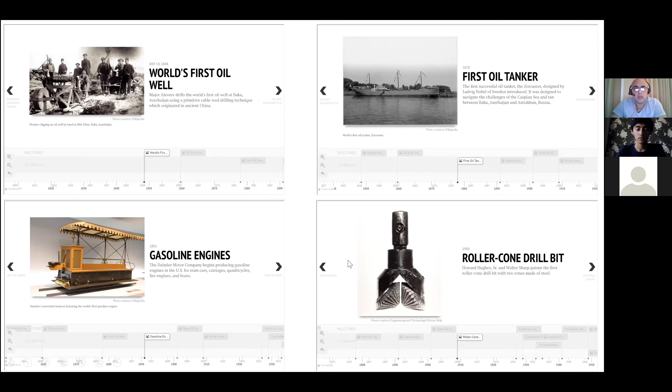Moving one by one: electrical logging. Nowadays it's also very typical, a simple thing, but it was introduced back in 1927.

Then we also got controlled directional drilling, because you always start with something simple - even just a vertical well is not an easy thing because of many risks. But Eastman, back in 1929, started doing directional drilling which he could control. I don't know to which degree, but there were successes.

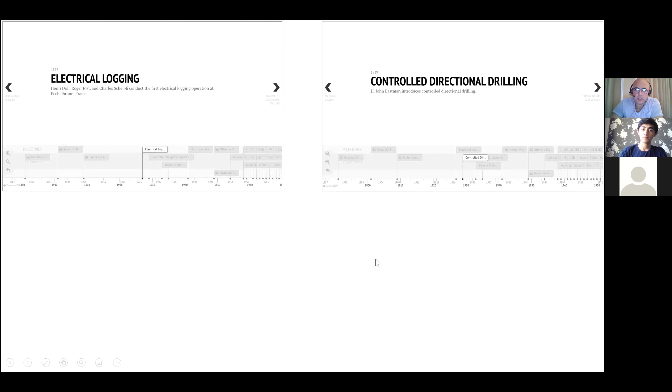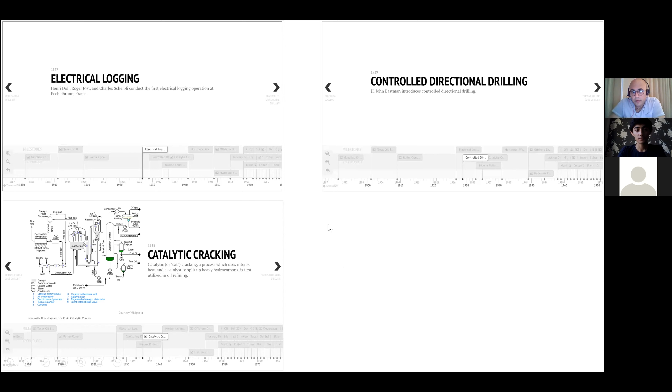Catalytic cracking - one of the important things in terms of refineries. This is the process of separation using intense heat and catalysis, splitting the heavy hydrocarbons. That was a big step forward for the industry overall, corresponding to the year 1935.

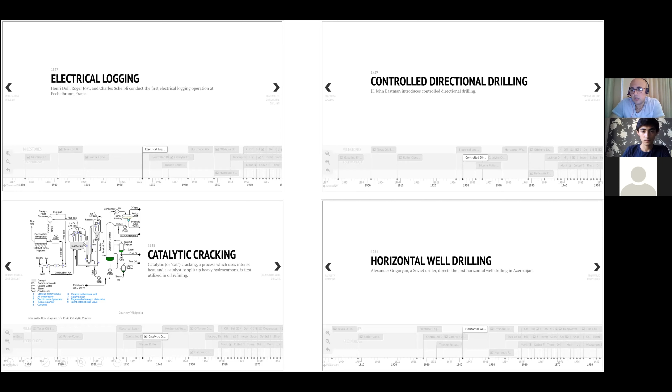Then horizontal well drilling - this is related to onshore horizontal drilling, and it also happened in Soviet Azerbaijan back at that time. Another quite remarkable thing for our country.

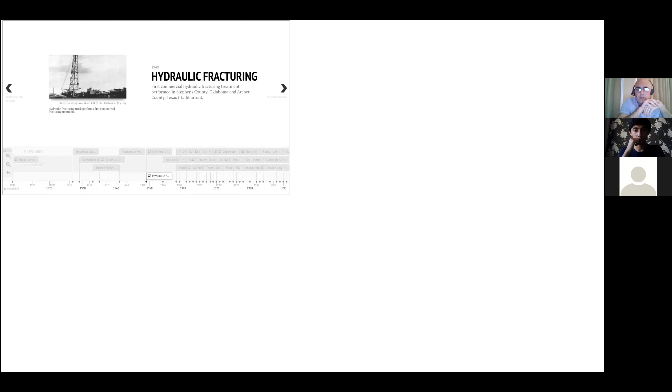Hydraulic fracturing - possibly all petroleum engineers nowadays have heard about it, especially during the events of 2014-15 with US shales, frack and pack, which dropped oil prices a lot, and the industry got mad while some companies got rich. But it first happened back in 1949 in Stephens County, Oklahoma, US, and a small county in Texas. Halliburton was the first to successfully do that. Back at that time, how you frack the well and why you even want to fracture your reservoir layers were not obvious to people. Imagine how much time, effort, and passion was spent on that. All of these events were remarkable in history.

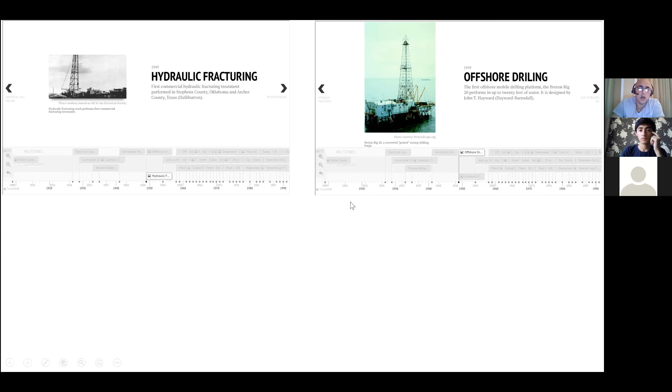Offshore drilling, back to '49 - SPE International basically claims the first happened in '49, the Breton rig. After that, many fields started being put into production, and nowadays we have so many offshore hydrocarbon fields under development.

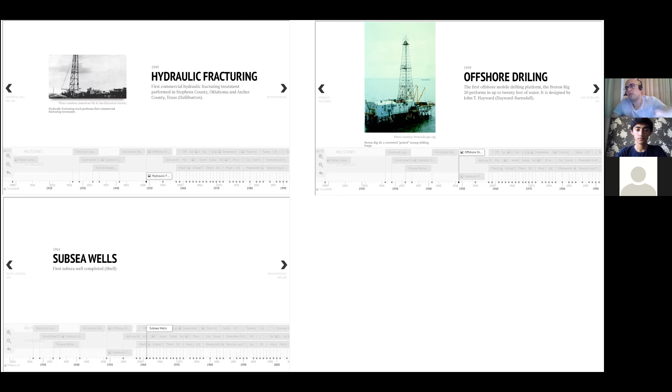Subsea wells, the year '61, first done by Shell company, another oil giant working on the petroleum industry. If you haven't heard about subsea wells, it's an alternative technology with some advantages - you're basically placing a lot of equipment on the bottom of the sea, which has a lot of benefits for those who do it.

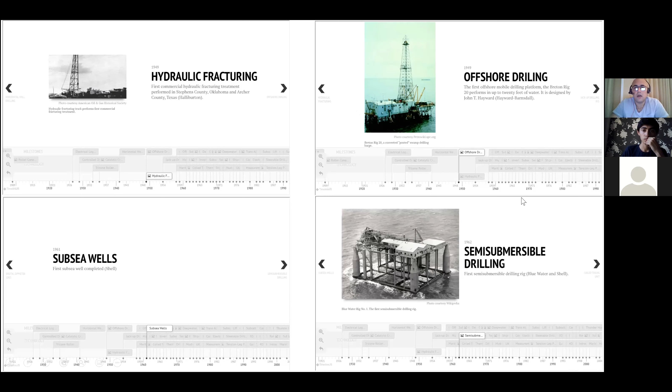So what do we do next - logging, but this part dates back to year '71. What was very important was the first logging system combining gamma ray, SP (spontaneous potential), induction spherical focused resistivity, sonic caliper - a set of several tools done for the first time, by the oil field service giant Schlumberger, back in '71, all in one.

There's a saying that diamonds are a girl's best friend, but not only - I'd say they're also friends of the drillers. They put diamonds into their drill bits, and that's where polycrystalline diamond compact drill bits came into place for the first time, corresponding to the year 1972.

We shortly call them PDC drill bits. As you know, since oil became crucial in the world of industries and people's lives, more demand, more population means the more oil or gas you want to find, new basically reservoir layers and rocks you are facing, and you need to invent new things. Drill bits in general are among the top things needed to succeed in that. You need to invent those, right?

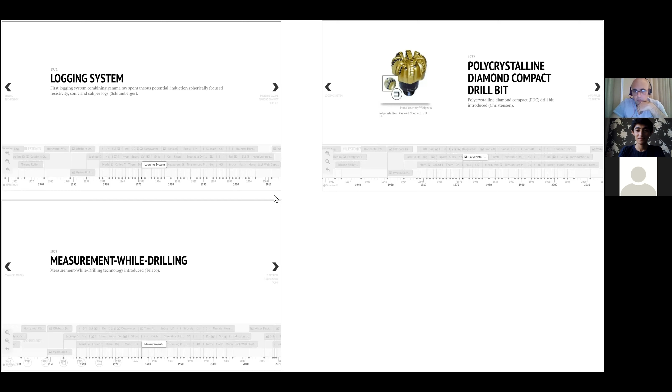Electrosubmersible pumps. Pumps are everywhere - it's not just about the oil industry, it's generally about all industries. We have pumps in the oil industry, and people have pumps in their yards to get water from wells drilled maybe 10, 20, 30 meters deep. They also put pumps over there, but to make it electrosubmersible means you're placing it into the well. That was quite a deal, especially imagine in a well which is usually kilometers deep. So we as an industry could do that back in 1980.

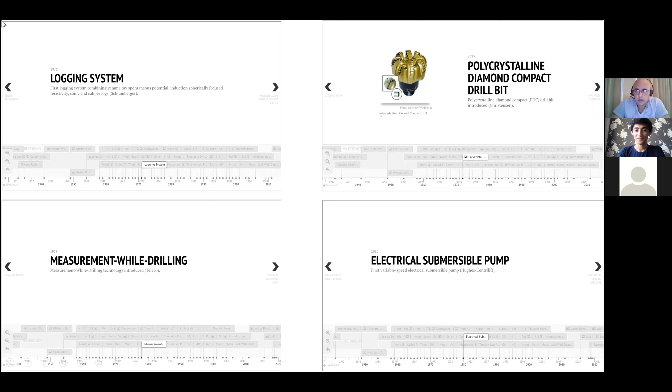3D seismic. Now we are moving to another topic. Probably some of you were asking why there's nothing on seismic or geology. So 2D seismic always existed, but 3D seismic is another story - you're basically doing it like grids, in comparison to 2D, and that was another step forward for better production optimization and field development. That has huge implications on sweet spot detection for future well targeting and understanding the reservoir's general behavior - where are the sands, where are the shales, where are the structures, and mostly where are the faults, if possible to see them.

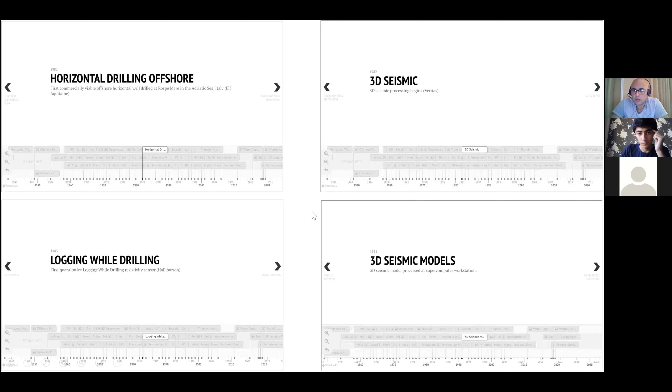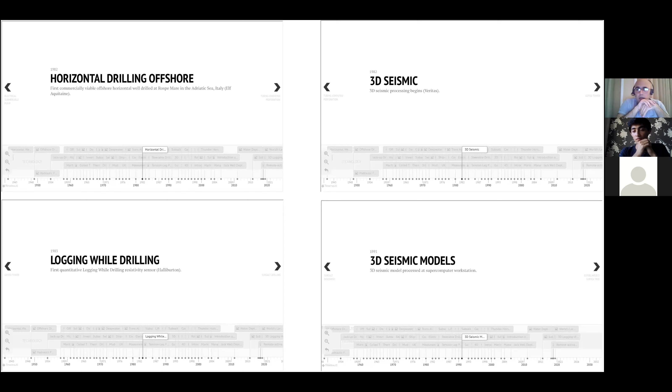3D seismic models go more into computational power. As noted, the year '82 brought us 3D seismic as data, and they were processing it, but they started to see that more and more models were needed, and more processing for seismic data, because seismic data is always huge in terms of memory. Look at the year 1991 - it's claimed that a 3D seismic model was processed at a supercomputer workstation. Back in '91, a supercomputer meant what a regular laptop is today - even as a child, that was such a toy thing to me. But they were building machines, rooms of computation as much and as good as they could, and it was quite expensive, and they were trying to do their seismic processing back at that time.

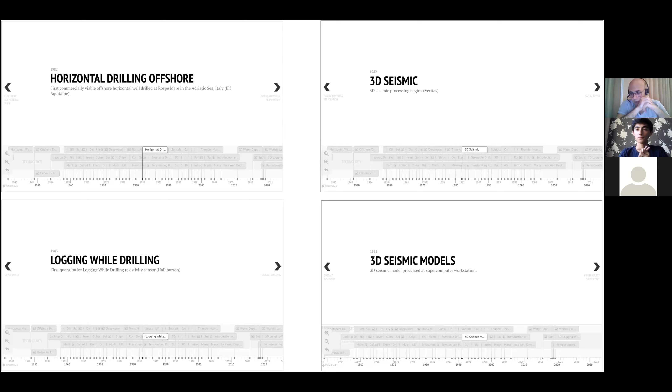Why was it possible? Because the oil and gas industry is rich - let's put it this way, they have resources, they have money, so they afforded it. For seismic monitoring, another step happened in '94, done by a company called CGG, quite a big one as well.

In terms of why we call it 4D, it's just time lapse. So you have 3D structures of your reservoir, but during the production, many things are changing. Amplitudes and responses, as most of what changes is a fluid distribution. So usually you have oil, gas, and water. They are changing. You do water injection, gas injections, and many stories around it. So you wanted to see dynamics. So 4D seismic back at that time was done first in '94 with CGG.

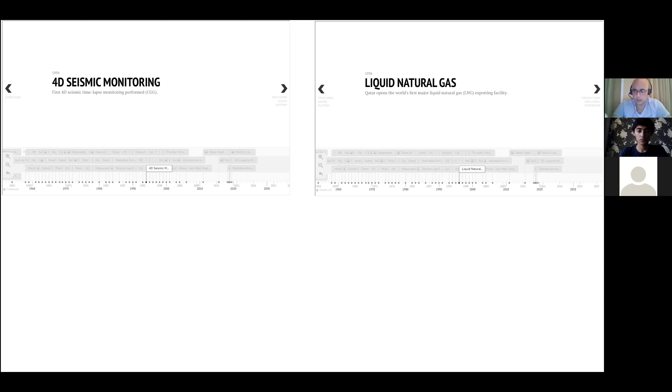Liquid natural gas. Imagine that such a simple thing like we see right now on a commercial, industrial, and wide scale was done first by Qatar, and Qatar opens the world's first major LNG exporting facility on a big industrial level back in '96. So why? The physics behind liquid natural gas might not be rocket science. Earlier than that date, the compression and storage stories for LNG were known, but I think that prior to that, probably there was no such a big need to do LNG.

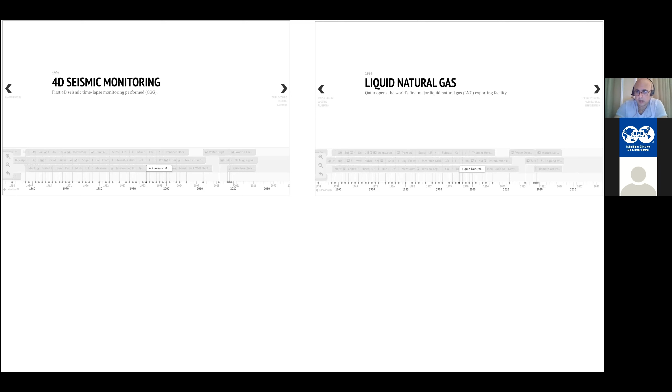Yeah, and as you know, also with the gas, it is the huge games of geopolitics. Oil prices are playing ups and downs every day and every minute, but gas trades are based on contracts. On local markets in the US, it's also playing around in each state how they sell to people and all of that. But between the countries, there are contracts, and also a lot of geopolitics happens. And LNG was done late, but it is considered a big step because LNG can also be transported easily.

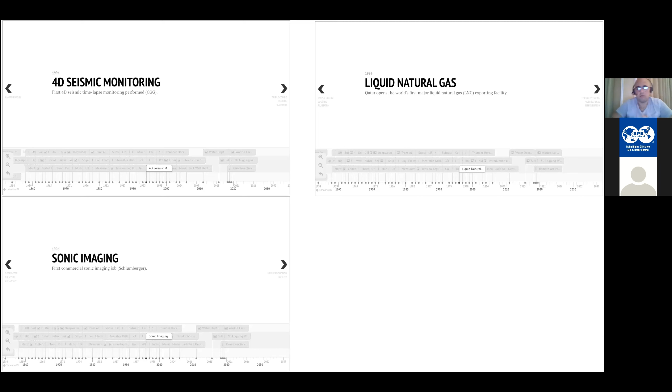Sonic imaging. For those who never heard of it, highly advised to go through that. Schlumberger did the first commercial sonic imaging job. It is quite expensive as far as I know, even till now. It was in '96, but not all companies can afford doing it, but it gives huge benefits.

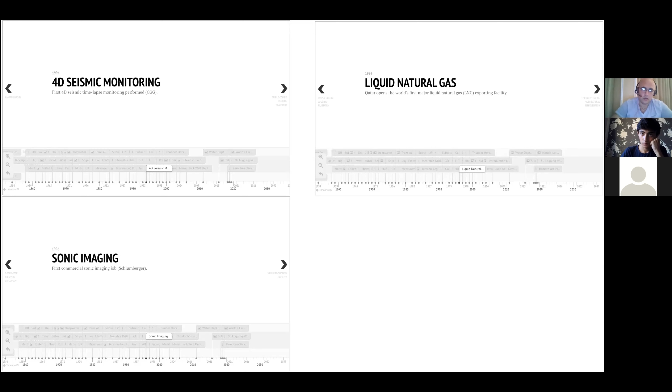So-called intelligent wells. What is intelligent about them? Basically, it is a well which can be monitored remotely. So you are sitting somewhere 100 meters or kilometers away, and you can do something to your well, such as closing the choke, closing the well, and all of that. And it happened in Norway first, in the Snorre field, Saga and PES.

'98 was the year. Extended reach well depth record, 10 kilometers, so quite a long extended reach. The well was drilled by BP, and it's not the deepest well. You can check for the deepest well ever drilled in general.

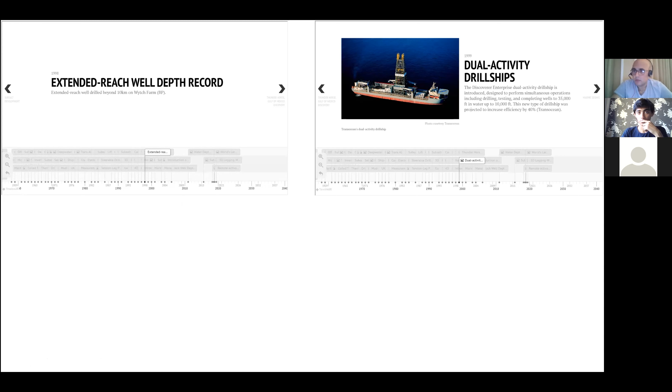So dual activity drill ships. Transocean was able to come up with an engineering solution: a drill ship where they can do a couple of things simultaneously. In this scenario, they were doing drilling, testing, and completion at the same time. And they have done it on 35,000 feet, and water depth was 10,000 feet. So not the best conditions, but they were able to do that.

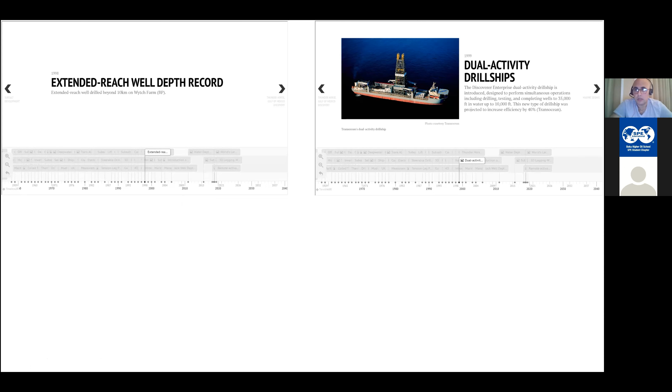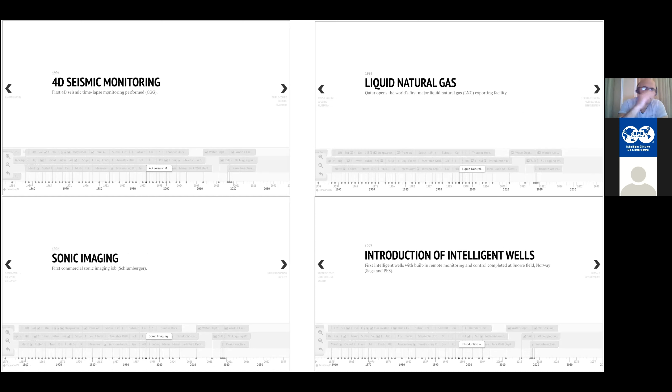And even beyond, now we call them smart wells. The industry in general is even trying to step towards solutions where they become autonomous, where human interaction is almost reduced. You do algorithms so that when something happens, the well reacts itself, without waiting for engineers to do something. So it's all going towards those autonomous stories. Though that part is mostly under development, part of current and future developments. But for now, intelligent wells with some remote monitoring, yes, they do exist.

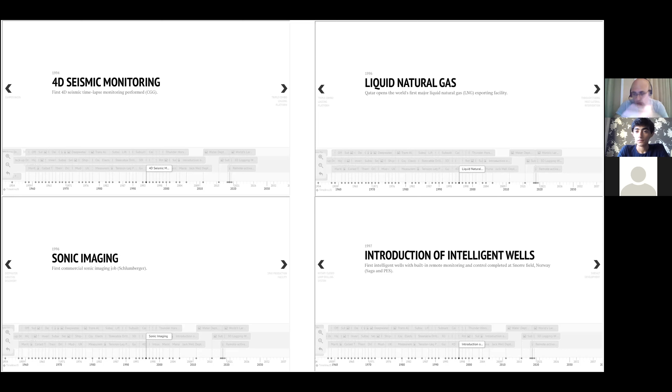Thank you. Sure, sure.

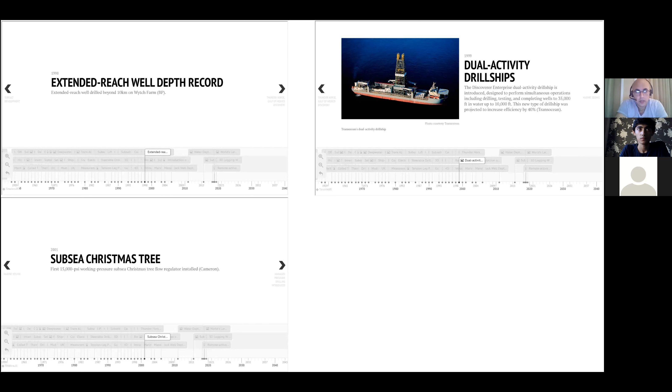So, subsea Christmas tree. I just mentioned the subsea before, and you all probably know what a Christmas tree is, that nice thing which saves lives, because of the safety, and allows us to produce and all of that. But on a subsea level, imagine it on the seafloor, handling 15,000 psi. It was first done back in 2001 by the company called Cameron. I guess it is Schlumberger's now.

Managed pressure drilling. Drillers never stop exploring, and they shouldn't stop, because there are more and more challenges. You need to invent, and to do safe drilling. You probably went through the concepts, especially PEs who already studied drilling engineering: the concepts of overpressure, losses, kicks, and blowouts, and all of those stories.

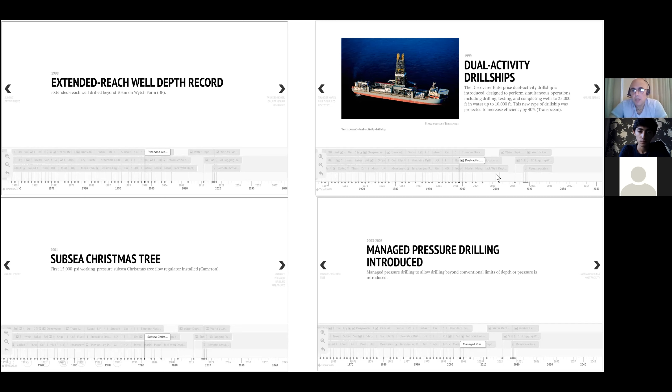So managed pressure drilling was introduced in the years 2003 and 2005. It was another breakthrough, and not any company can do that. It allows drilling beyond conventional limits of different depths, pressures, and temperatures. But mostly it's, of course, about the pressure.

Now, what is more fancy nowadays? To be honest, the previous inventions are quite important, but now they become even fancier and, of course, useful. Autonomous offshore robots in April 2018. I'll show you videos and deep dive into this more, as it is more about current and future developments rather than historical, because so far I classify what we covered as historical.

As you know, offshore is a special place. You can't have as many people as you want there. It is not even good for safety: if something bad happens, it affects people. So basically you are trying to invent robots which will maximize your work. It was done by TU Darmstadt back in 2018. They are already working on the platforms.

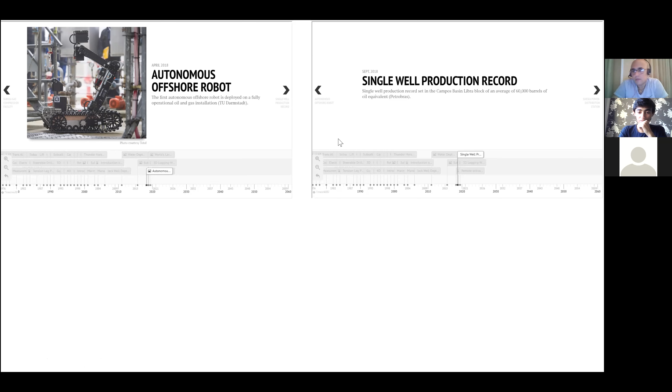By the way, there was also quite a remarkable event. It's not about innovations, although I'm pretty sure, despite the reservoir conditions, people did a great job to get such oil production from a single well. In 2018, the single well production record was beaten by Petrobras, the Brazilian company, in the Campos Basin, where a single well gave 60,000 barrels of oil equivalent. There are plenty of fields in the world where the entire field cannot produce such a rate. So it was quite a big number.

And at the end of 2018, the biggest SPAR platform, Equinor's, was sent to deployment in their harsh conditions. We can classify it as an engineering masterpiece, I would say. In each of these things we mentioned, there were scientific and innovative approaches where people really made breakthrough steps. That's why we give them the credit and recalled all of them.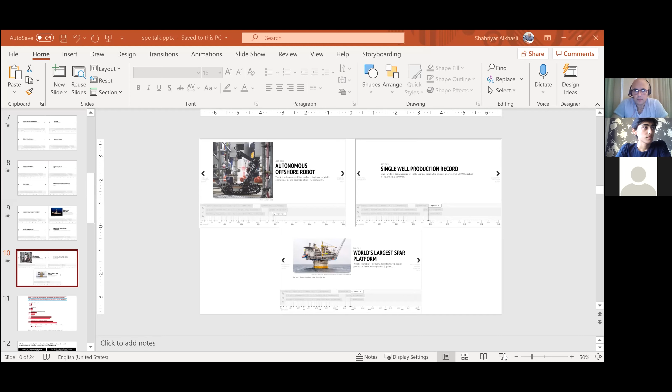From now on, I'll just pause for a couple of minutes here in case anyone has comments or questions, because afterwards I will move to things related to the current and the future. So any questions, any discussions you would like to open up, please feel free. Still, there is no question in the chat section. I see. Anyone speak up? No, everyone is shy. Okay. If no questions or discussions, let me go to full screen mode. Can you see it full screen again? Yes, we see. Okay. All right.

Now let's think of innovations which are more current and upcoming. Before that, there are the big four audit companies in the world, and one of them is PwC, PricewaterhouseCoopers. I found a survey from them where oil and gas respondents, like stakeholders and managers, were asked how important innovation is to the success of their company now and in 5 years' time. Does it really matter?

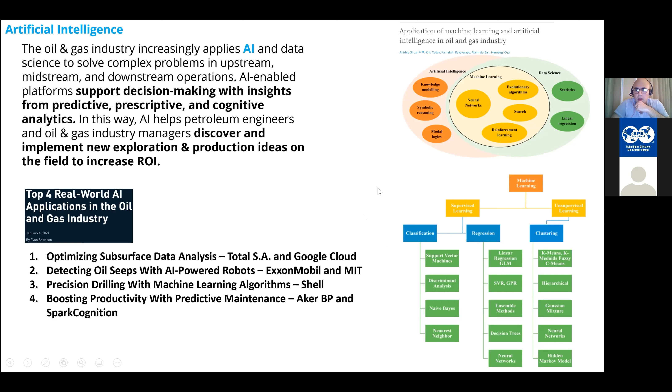So I mentioned predictive maintenance generally. So what type of summary may we have? Imagine you have a tool, and one of the tools which was quite popular throughout the years in the industry is a pump. So how can you treat it? When you have a pump, it means you bought it, you spent a lot of money on it, and you need to care about it. But there are different strategies and possibilities towards it. So in general, predictive maintenance algorithms allow engineers to quickly assess equipment and its conditions, and offer maintenance solutions.

So what it means basically, for example, when you drive your car, you are continuously refreshing your oil, right? In order to have a smooth work of your car. So that's more or less preventive as well.

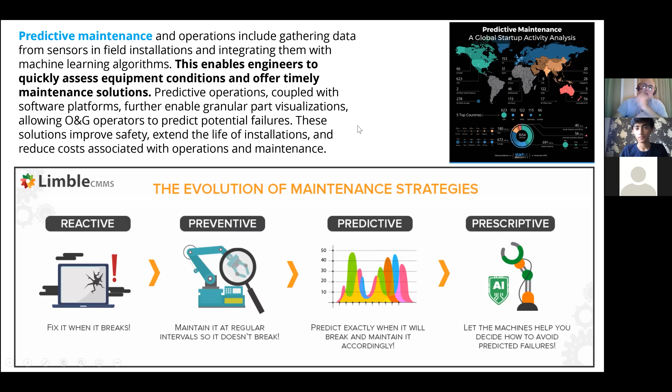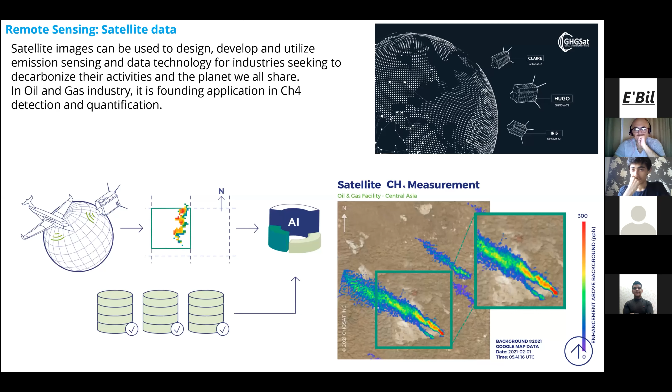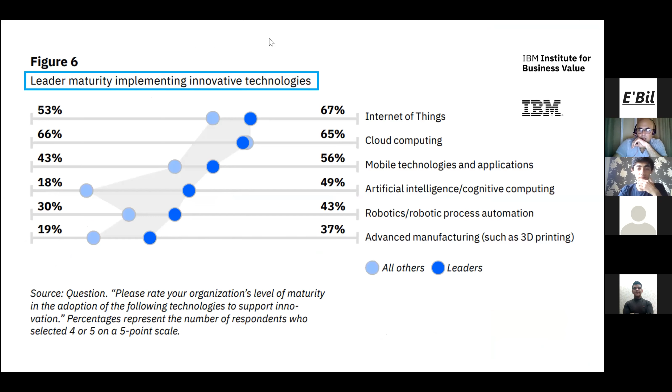Sometimes it's really good to do cool things, but do those cool things really bring money? Unfortunately, innovations are driven by money. That may seem not that cool, but it is the reality of the world. And for example, let me bring you an example. Imagine that you are in a country and you know that wind renewables are cool.

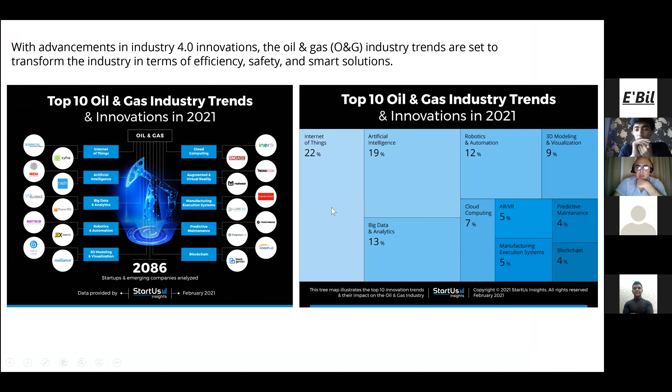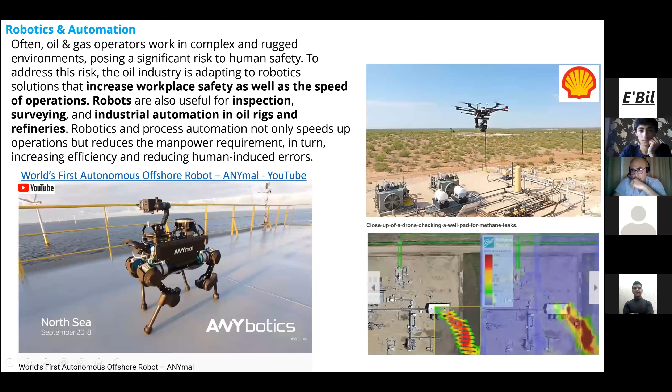Okay, so oil and gas and IT. If I may, just to bring a single example - in the world, many companies are using software, and oil and gas software which does many calculations can always be optimized, both from a hardware and software perspective. For example, many of you, especially those studying computer science related disciplines, have heard of GPU computing - parallel computing. Back at that time, there were no software available on GPUs. GPUs were not that popular, obviously, and even after they became popular, that transition did not happen fast. So knowing things like GPU - right now let's say I'm talking about things like CUDA - for IT people, CUDA technologies will be known.

And software development, web development - as I said, nowadays the trend is going towards scientific computations also on the web, in the oil and gas industry as well. No one wants to deal with desktop applications anymore because of challenges with data transferring. When it's on the web and connected, for example, to the cloud where the data is stored, if your engineer friend has changed something in that folder or changed the data, you'll know it - it's synchronized.

Regarding the application - go to link at Hazar.org, drop your CV, and our recruitment team gets you into our database. We have a queue, but definitely when your queue is up, we call you.

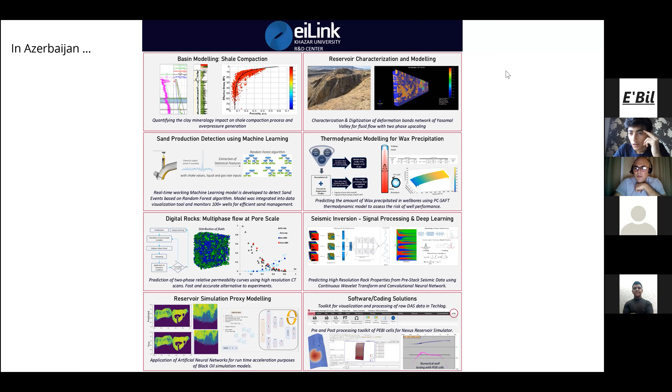Sorry about that. Okay, we have one more question, as I see. It's asked from Madina: What energy saving methods are available in various sectors of the oil and gas industry to increase energy efficiency and reduce energy consumption? For example, oil refining is a complex process, it requires a certain amount of energy to achieve the production of specific oil products, and is an area of activity that requires about half of the energy consumed by the oil and gas industry as a whole.

It's kind of a long question. Yeah, I think I found that. I would just quickly read it once again.

Okay, so for example, even drone technology is one of the energy savers. For example, recently, imagine—very simple example. Equinor, their platform was quite close to the coast, but it was an offshore platform, and the battery of the drones allowed them to fly there and back.

So they took the drone, sent it to the platform. The drone did 3D camera shots, videos, and inspection—not just for fun. It was quite important for them to do inspection in 3D from all angles of view. If that drone technology didn't exist, they would have had to send a helicopter in order to fly around and see the things around and all of that.